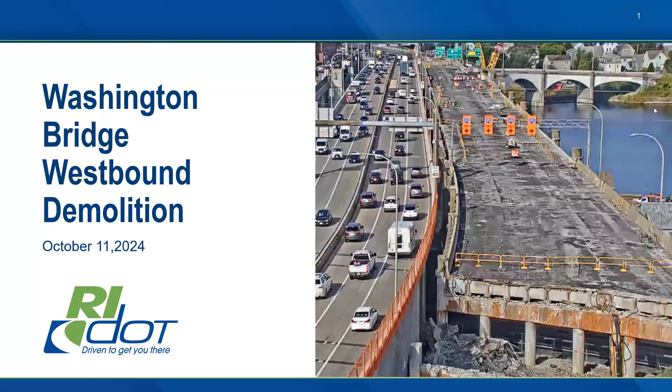We are here to review the westbound Washington Bridge demolition project. Work has been paused since September 17th. Demolition will now resume on Tuesday, October 15th. This will be one of several town halls we will have regarding the project. Tonight, we'll be taking you through the demolition plan necessary towards the rebuilding of the westbound bridge.

Early demolition work has raised concerns about construction impacts from noise, dust, and traffic. Other comments we've received have been about day versus night work. We will be addressing those impacts tonight. RIDOT will also share how attendees and those who watch this recorded webinar over the next week will be able to follow the project's progress during construction.

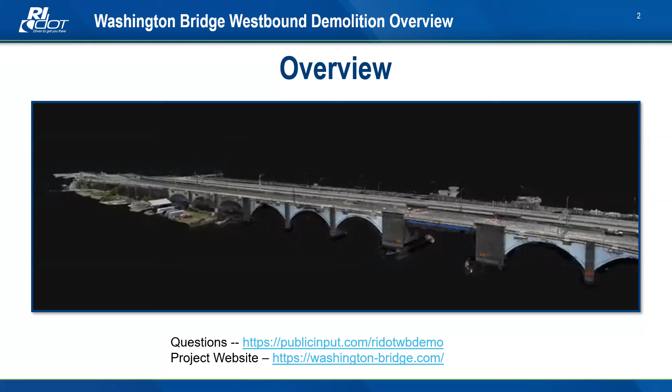I just wanted to go over our agenda for tonight. Our agenda for the night includes project scope, noise, dust and traffic impacts, demolition grouping schedule, next steps, and where and how to post questions. Again, questions can be input now during the presentation and after on our website, with all questions answered in writing as soon as possible after we receive them.

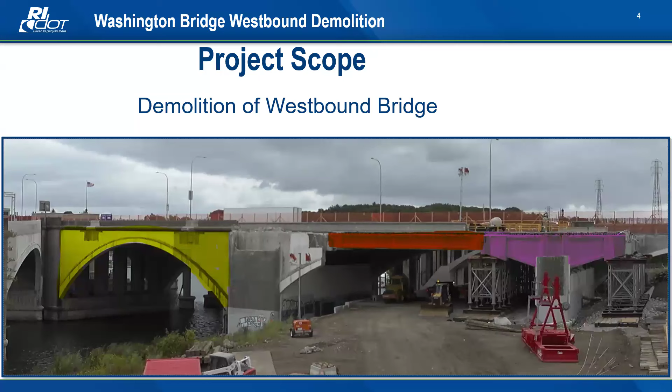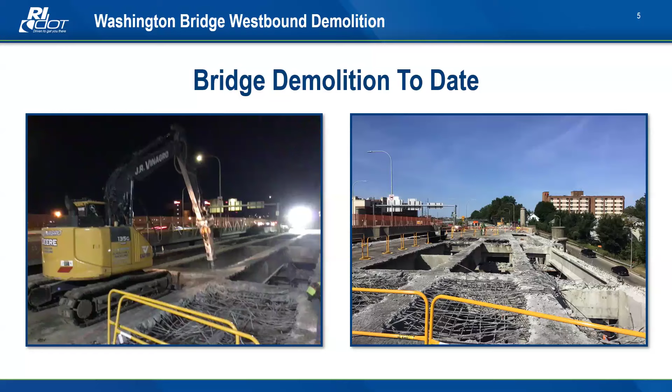Before we review our plans for each section of the bridge being demolished, we want to address the concerns that have been voiced to date regarding noise, dust, and traffic. Regarding noise impacts, we are down to our last 2 to 3 nights of noisy overnight hammering, which are scheduled to take place next week. This work, similar to the hammering that has taken place to date, must be completed during the overnight hours when we are able to close Gano Street to all traffic without impacting traffic in the neighborhood.

After completion of these last few nights, night work will continue throughout the remainder of the project, but will produce less noise, similar to typical construction activities. These activities include saw cutting and general operation of heavy equipment. The noisy hammering required for deck demolition to complete the remainder of the project will be conducted during the daytime hours between 6 a.m. and 9 p.m., as we will be able to complete that work without creating significant impacts to the traffic on the streets below the bridge.

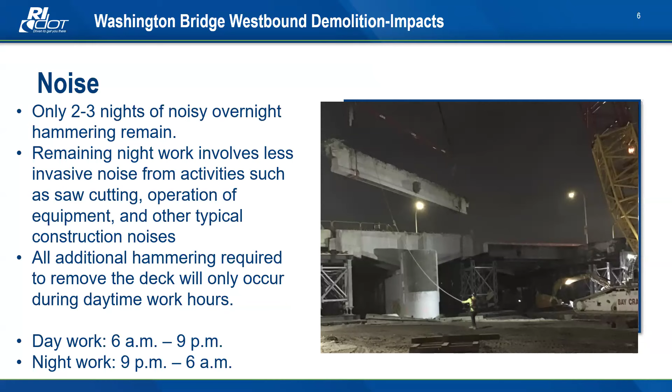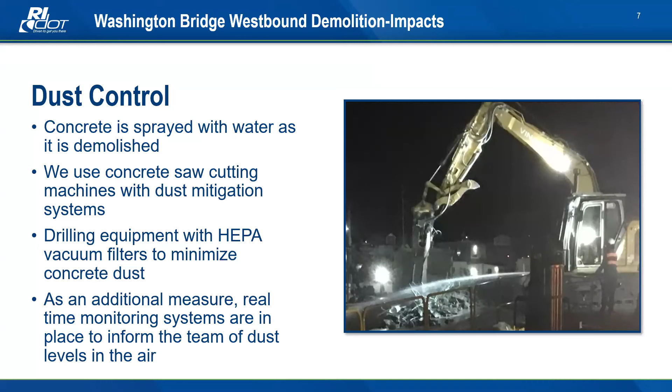For this scope of work, impacts to the traffic are generally restricted to the local city streets that run beneath the bridge. Our overnight closures of Gano Street for overhead demolition are scheduled to resume next Tuesday night, October 15th. During these overnight hours, traffic will be detoured around this location, and this will continue nightly until work at this location is complete, approximately 2 to 3 weeks.

Also beginning Tuesday night, we'll be implementing a full closure of Waterfront Drive in East Providence, which will be in effect 24/7 and remain in place for approximately 1 week. The detour will utilize the adjacent Valley Street. Signs will direct vehicles along this detour.

For our bike paths in the area, aside from a few limited overnight detours during beam removal, the Gano Street bike path will be maintained open throughout the project, and there will be no impacts to the George Redman Linear Park, which carries the East Bay bike path over the river. Any changes to these closures will be broadcast via RIDOT's travel advisories and on RIDOT's website.

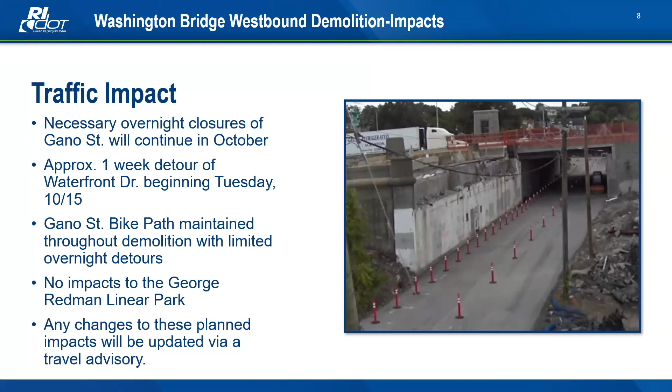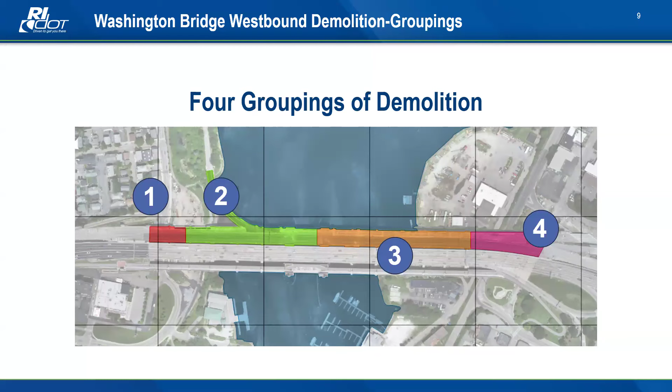Groups 2 and 3 that make up the middle span of the structure will begin upon completion of groups 1 and 4. We anticipate this work starting in November and to take up to 4 months to complete. Work on these 2 groups will be performed simultaneously. And with that, I hand things over to Pam to discuss next steps and where to input questions.

Hello, I'm Pam Cotter, Administrator of Planning at RIDOT. As we said at the beginning of this presentation, we're focusing mainly on the demolition of the westbound Washington Bridge. We have heard the concerns of the neighborhood over the last several weeks, and we hope to address them all.